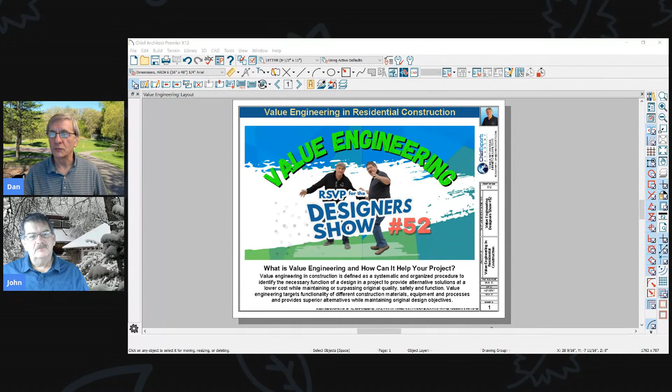It's, well, let me read this lovely description I got from the internet. What is value engineering, and how can it help your project? Value engineering in construction is defined as a systematic and organized procedure to identify a necessary function of a design in a project, to provide alternative solutions at a lower cost while maintaining or surpassing original quality, safety, and function. Value engineering targets functionality of different construction materials, equipment, and processes to provide superior alternatives while maintaining original design objectives. How's that for an explanation, John?

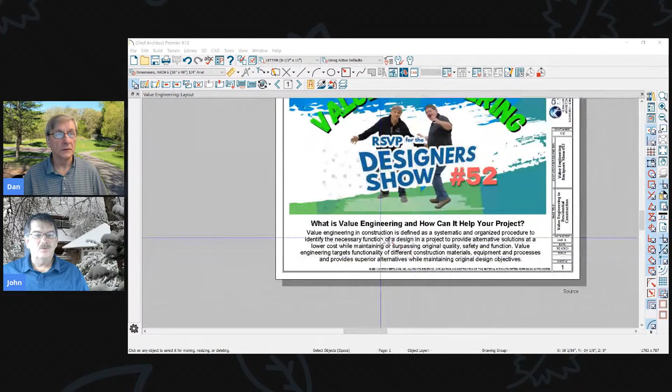That's pretty cool. I saw that and I thought, I like that. That's really, I mean, it's pretty deep when it gets into, but it's really true. What we're trying to do is find alternatives that work just as well or better at lower cost, while increasing the quality. Exactly.

So with what's going on in industry right now, with these prices going absolutely bonkers on your lumber and other things within the project, it's like, well, what can we do to maybe help in the process to offset some of those extra costs that are happening there? I know a lot of people, it seems like people are continuing with their projects, even though the prices have gone up 30, 40,000 on a new home, and more in some cases.

And then on large remodeling projects, you're going to deal with some of the same things, possibly partly because we've got lower interest rates. That's helping offset some of that. That might be part of it. I'd love to hear what other people are experiencing with that.

So guys, please chime in on this topic, and what are you seeing out there as far as what people are doing? Are people postponing their projects? That's one of the concerns I have, is if these prices keep going, people are going to halt. They're going to wait to do their projects, and maybe that's a good thing, maybe not. I don't know. Is it going to affect our industry?

I mean, I certainly don't have a crystal ball in any form whatsoever. Maybe we can go back and look a little bit at history to see how this played out, similar situations in the past, but I don't know. This is unprecedented, I think, with the way the prices are going. Are you aware of anything that was similar to this situation, John? Anybody out there? Are you aware of anything like this that's ever happened in the past? If so, let us know.

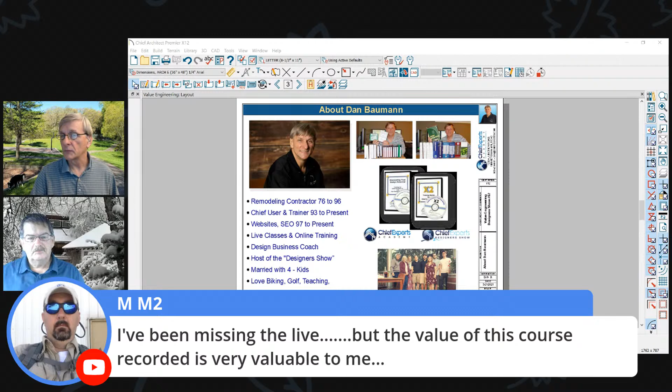I've been missing the live, but the value of the course recording is very valuable. Thanks, Mike, appreciate that. There's no slowdown in residential construction, in fact it appears to be picking up. Isn't that amazing? It's just mind-boggling.

Existing homes are okay. Existing homes in Oklahoma are going for unbelievable prices, and it's like that everywhere, crazy prices. Not slowed down, but there's labor with stimulus money staying home. Yeah, I suppose there's some of that going on.

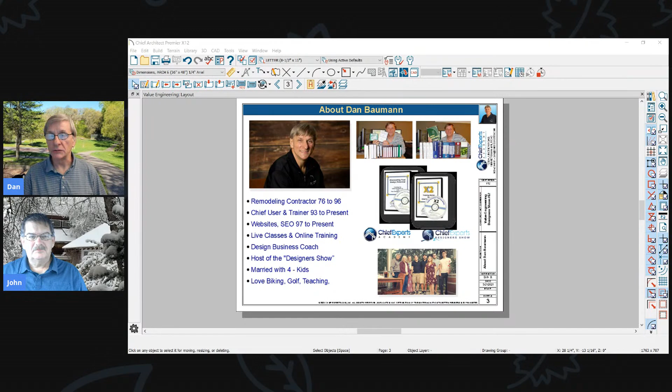Although, whatever, that's a whole different topic. But yeah, labor has always been and will continue to be a challenge in the construction world. It's just the way it's going to be.

Back to this a little bit. I left these in here from a previous presentation, just because I've been doing this for a long time. Been teaching using Chief since '93, doing websites, live classes. I do design coaching, design-build coaching. Got 4 kids, love biking, golfing, teaching.

And John, you've been doing this for a long time too, using Chief since '05. Long time, God, 16 years already. 17 years already, where did that time go? You've been helping with all my classes, you're just wonderful to have along to do that. I can't wait till we get back out there and do more.

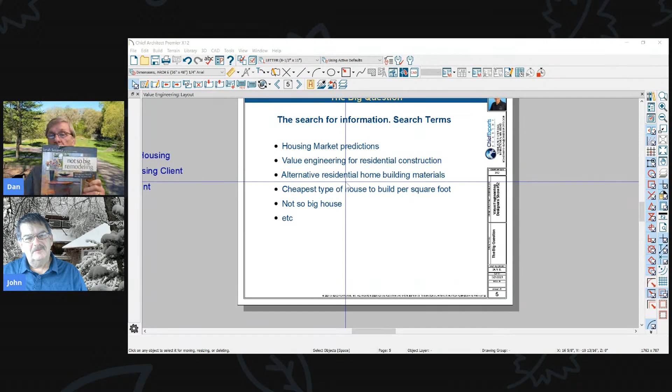I got on Google and started searching a few terms, and it's amazing the amount of information you can find with just a few terms: housing market predictions, value engineering, alternative residential home building materials, cheapest type of home to build per square foot, the not-so-big house. If you're familiar with Sarah Susanka's book, The Not So Big House, she has a whole series of these books that are really excellent, where she dives deep into adding more quality to the house instead of quantity. Highly recommend her series.

What's that, John? The square foot price of those houses is way higher than a bigger house. True, it could be. That's her whole deal: pack more amenities into a smaller package versus create a smaller package with some basic amenities. So you get a lower priced house, but the square foot price is going to be higher. Exactly.

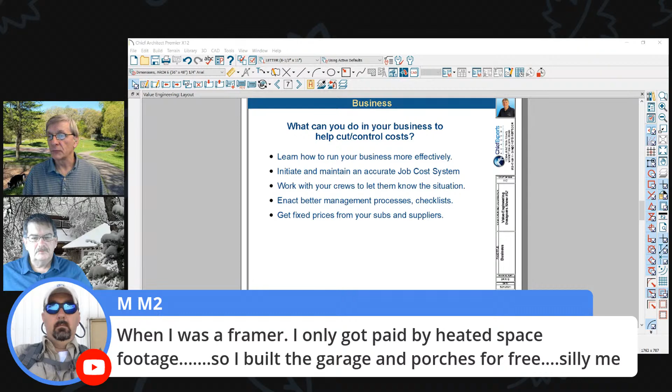Well, you should have just charged more for the heated space. That's another way to do it. In that case, if you want a cheaper house, just build a garage. Well, that's true, and then you can get it built for free. That's one way to do it.

So let's talk about something else. When we consider this as a contractor, and as a designer working with a contractor, what can you do in your business to help keep the job costs down, keep the costs of the project down? Because there's probably a lot of waste going on out there in a lot of companies that don't have some of these systems in place. Just learn how to run your business more effectively, and that goes without saying for anything.

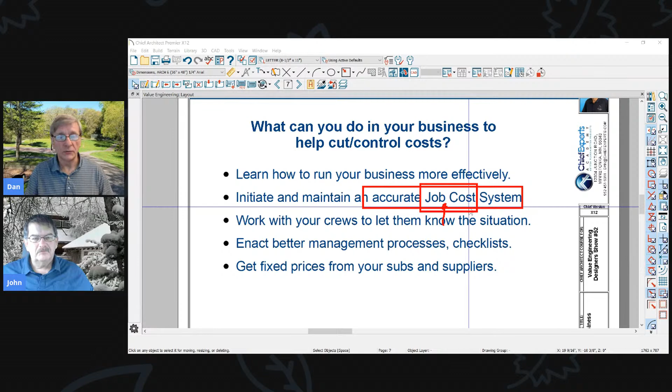Initiate and maintain an accurate job cost system. I think it's getting better out there in the industry, but this is an area I've seen a lot of contractors miss the boat on. You've got to know every penny of everything that goes into each specific project. So you need to implement a job costing system that works for your business — whether it's a spreadsheet, QuickBooks, or one of the other thousands of accounting programs out there, you've got to know the costs that go into every project. That'll help you now, and it'll help you in the future when you're working on future projects.

Work with your crews, let them know the situation. Hey, you bid on a job, you locked in a price, and now you're paying a whole lot more for materials — what can we do to put our heads together to save some money on this project?

Hopefully you've got clauses built into your contracts for the contractors out there, that if prices go up, which they have been and will continue, you're only locking in that price as long as the lock you can get from your lumber company. I know our local lumber company, Sher Brothers here, will lock a bid price for 90 days because that's how long their stock lasts. Which is kind of interesting how they do that — I don't know how they roll over the stock.

Enact better management processes, checklists, and get fixed prices from your subs and suppliers. Of course, if they were smart too, they would be putting a clause in their agreement that says if prices go up, you have to pay more.

Okay, yeah. So some of our trade and vendor pricing is good for one week. Isn't that amazing?

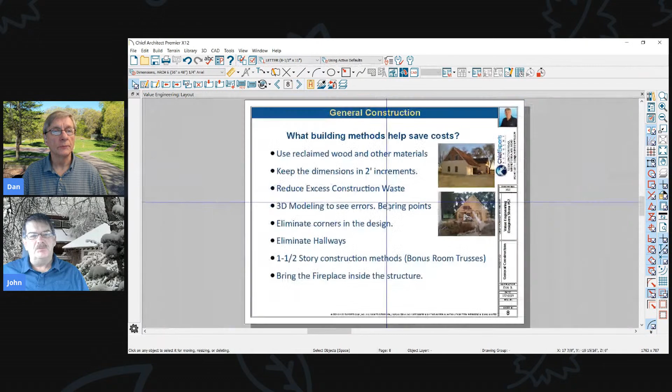My guess is it's prescriptive, like the energy code is prescriptive, telling you how you're gonna accomplish what they want. Where engineering in the energy code would be, you're gonna do all the calculations to make the system work the way the code wants it to work instead of just going by what the code says. So it'd be the same thing in engineering. Try to get prescriptive all the time. Okay, so we agree, try to get prescriptive all the time.

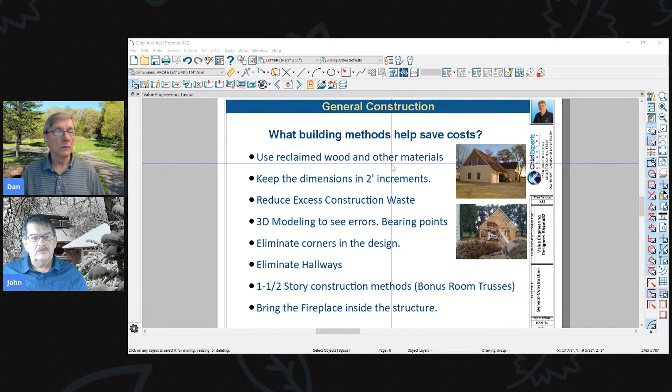Cool, all right, so let's look at a few different things. I just threw together a list of things as I was doing some research, and things that come to mind here. I would love you guys to put in what kind of things you're doing to lower the cost of your projects. I think this is really important that we share, let's put our heads together on this and share some ideas.

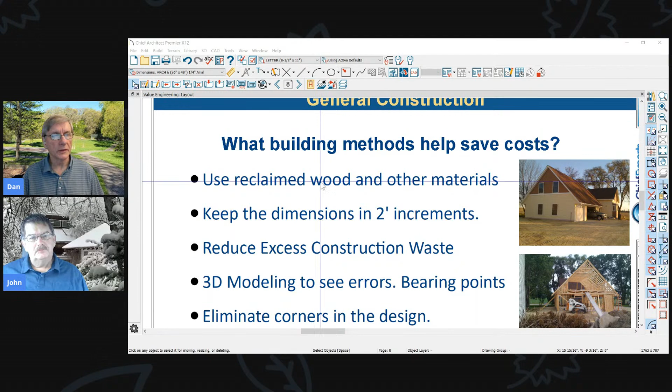Using reclaimed wood and other materials. Yeah, I mean, that's pretty obvious. If you got some leftover wood somewhere, use it. If you can get some wood that's used and it'll fit in a project, use it.

Keep the dimensions in 2-foot increments. Don't build that room addition at 16 foot 6 inches, because that extra 6 inches means you're going to waste a lot of material. Now your 16-foot boards have to go to 18. Your sheets are going to get cut off and you're going to have extra sheets involved. So that's a pretty simple thing to do in your plans, just keep them in those 2-foot increments. And I found that works really well.

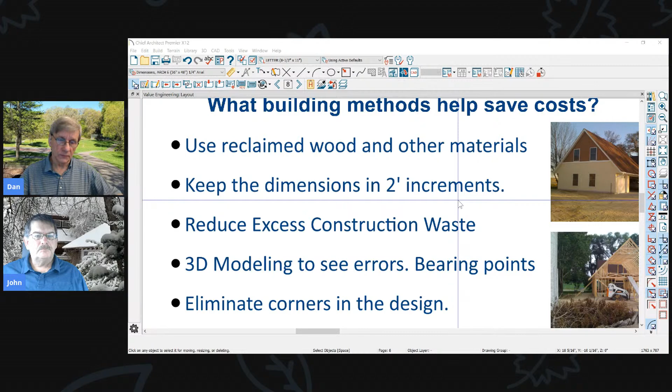Reduce excessive construction waste. I suppose that could go in a lot of ways, but again, I think with a tight plan, with the right dimensions, with ordering the right material... one of those might be, I know some contractors, they just put 2x10 headers everywhere. So they're buying all these 2x10s to do their headers. Well, why not use the right size headers above the right size openings? If you only need 2x4s over an opening, just use those. Don't use 2x10s. That's just from when material prices weren't such a big factor in a house.

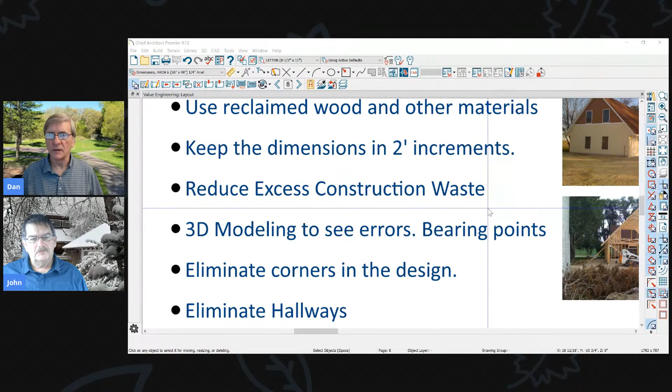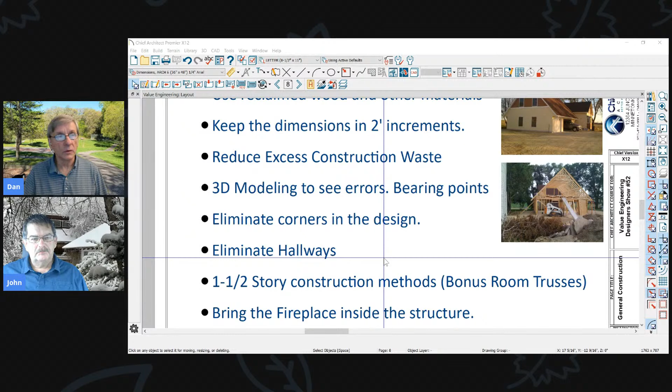What's a 12-foot 2x10 go for now compared to a year and a half ago, John? Any idea? You'd have to look it up, but I would suspect a lot more, two to four times as much. A sheet of OSB is $40-50 or more versus $9 or $10, which it was a year and a half ago.

3D modeling. Okay, this is where you Chief guys really benefit, in that as you're putting your plans together, you can see problem areas as you're working on them. So how are you going to work those out in your plan? Bearing points, you can easily see those from floor to floor as you look at your 3D model and pull that together.

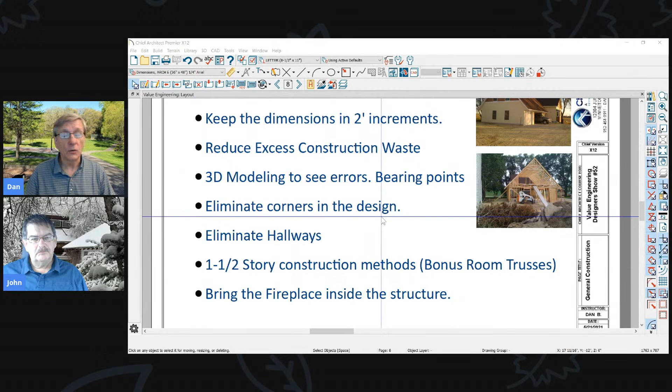Eliminating corners in designs. If you have a house that has lots of bump outs and angles and things like that going on, every time you can eliminate a corner, you can eliminate some cost in that project. And that's going to make a big difference.

Whenever people ask me how much per square foot this house is going to cost, I say, I don't know. If you build a 20x20 house, that's 400 square feet, you've got 80 lineal feet of wall. But if I build that 400 square foot house as 400 by 1, I still got 400 square feet, but I've got 802 lineal feet of wall. So the shape of the house makes a big difference in what it costs to build it.

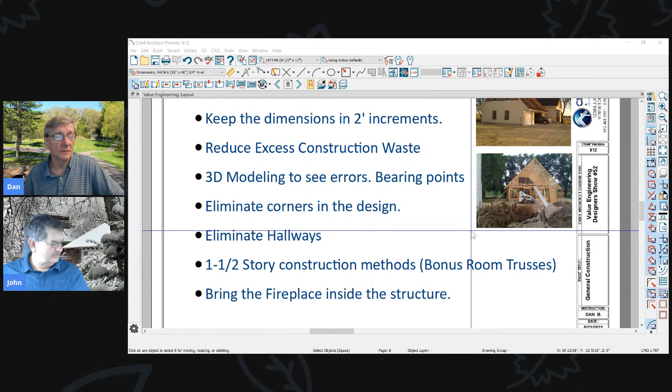It really does. So even on a bigger house, if you start pulling out some of those little bump outs and crazy things like that—in some cases they do make the design, so you need them—but there are places where you can always simplify things. Eliminate hallways. I think you mentioned this yesterday, John, in your plans. Yeah.

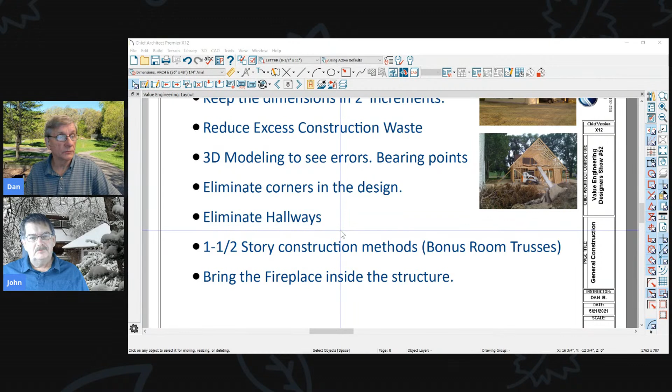If you are designing it, if there's any way you can eliminate some of the hallway or all of the hallway, it's just wasted space. If you can get it out of there, that's going to make a big difference.

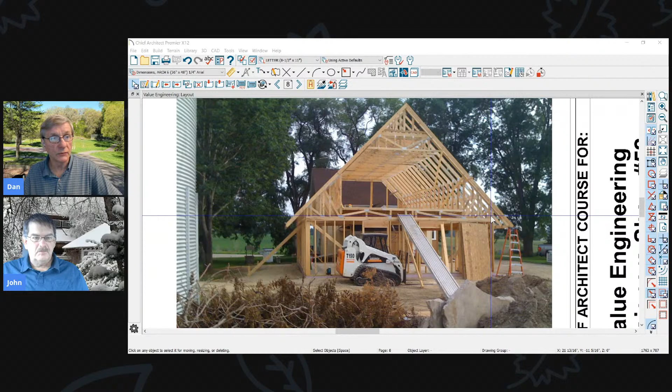1-1/2 story construction methods - I've done a lot of work for a guy named Bruce, and he built a lot of houses like this, using those type of trusses for the second floor of the house. Of course, he's not getting as much square footage, but he and a helper would put these up themselves. He had his Bobcat, he'd lift the trusses up and bam, they'd get that all done in a day. He really had a good system down.

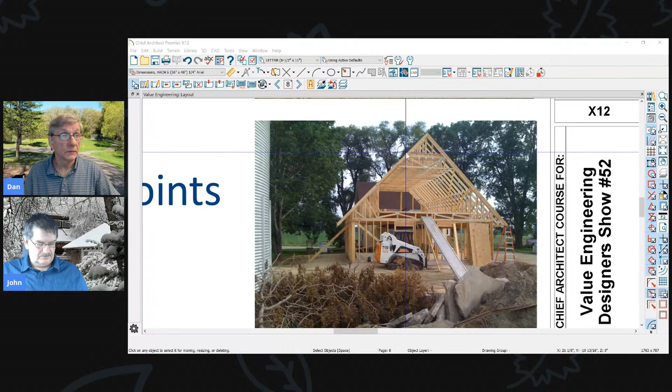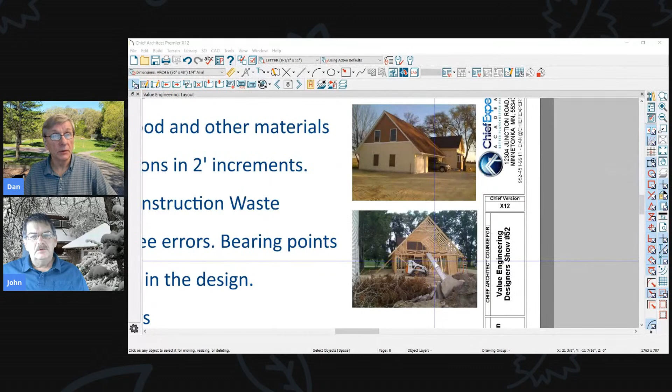He designed a lot of his houses like this, and they really turned out to be gorgeous looking houses. That's a good looking house when it's all said and done. So he focused more on doing nice finishes inside, a little bit better casing, things like that, but his construction methods were always extremely simple and easy to do. He could put up a real nice house, save his clients some money, and his margins were better than most. So that's another construction method I highly recommend.

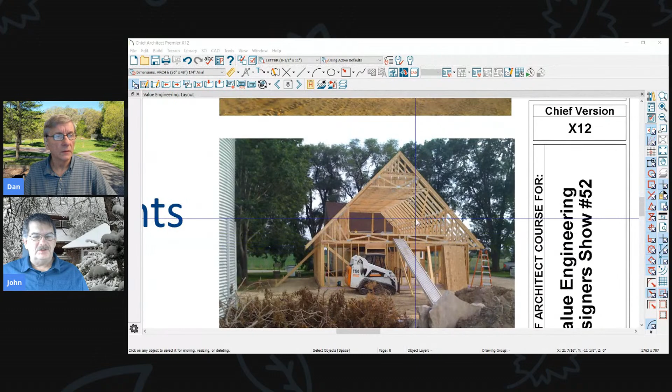You've done much of this kind of stuff, John? Not a ton, but that's my favorite design right there, as far as being cost effective and stuff.

How are roof truss prices affected these days? Is it the same price of the lumber rolling into trusses, you guys out there?

I'd also be interested to know how many people use trusses, because there's a lot of places that don't even use trusses. True, a lot of people hand frame.

Whenever I was building, I tried to use trusses whenever I could. It's just much easier to construct a project - no need for beams or anything, it's all built in. So it's a much simpler method of construction.

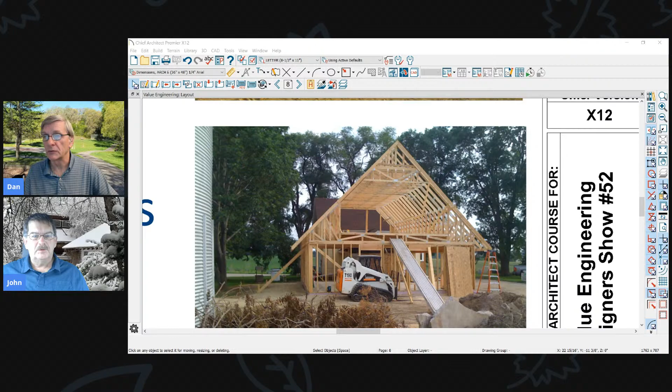I like trusses, but some guys just don't. Part of the problem with trusses is you got to wait for them. It's like anything else these days - you're 4, 6, 8, 12, 10 weeks out to get your trusses. That causes some real headaches sometimes. So something to keep in mind.

Bring the fireplace inside the structure. If you're doing a zero clearance fireplace, don't put the chase on the outside of the building - bring it on the inside and just run your venting out. That's going to save you corners, eliminating corners in that process, and that'll save you some money in putting that together.

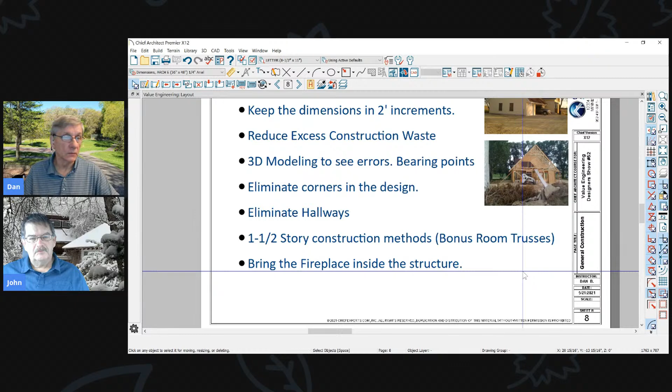It's a lot cheaper to sheetrock something than to put siding on it. So something to keep in mind there. But again, some projects need that chase to make the design work.

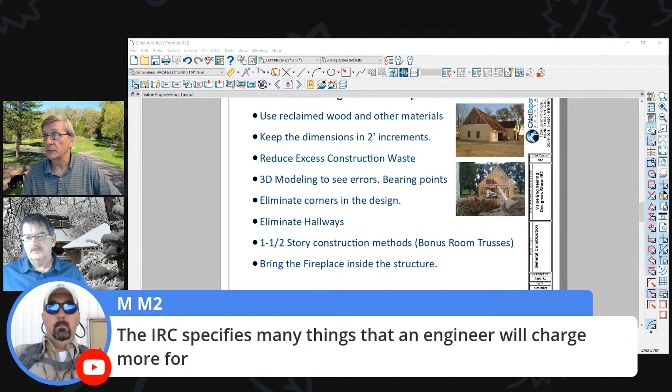So we've got a few comments here. The IRC specifies many things that an engineer will charge more for. Yeah, that's IRC.

Insulated concrete forms are starting to look cost effective. I've had a few builders switch from traditional foundation and framing to all ICF, partly because he was going to do a lot of the work himself in conjunction with the ICF supplier. It seems like many ICF suppliers will supply all the bracing and all the coaching, and in some cases, some of the labor to help put these things up.

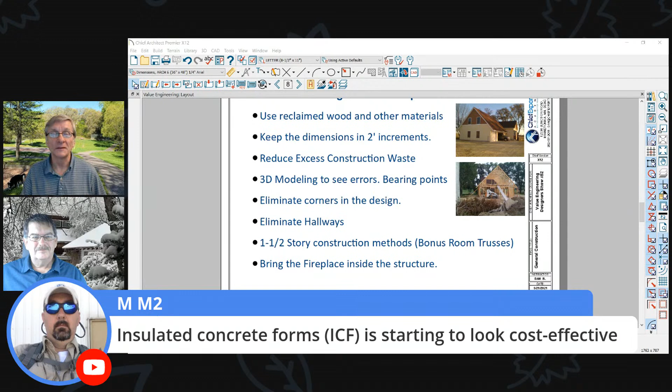One thing about ICF, you can never brace them enough. I had a friend of mine did an ICF once and they didn't brace this one wall enough, and it started tipping. They had to tear it out and redo that whole wall.

Not cool. Offsets may look cool, make a nice roof line, but it's a pain with most trades. Yeah, absolutely. Total project schedule for all trades based on tasks required to maintain construction schedule, plan construction drawings accordingly.

So just having a good schedule for the project so everybody can get in and out as planned. That's huge. I wonder how many contractors actually do construction schedules, because they're easy to do but hard to implement. If one thing gets blown out a little bit, now everything's out of whack.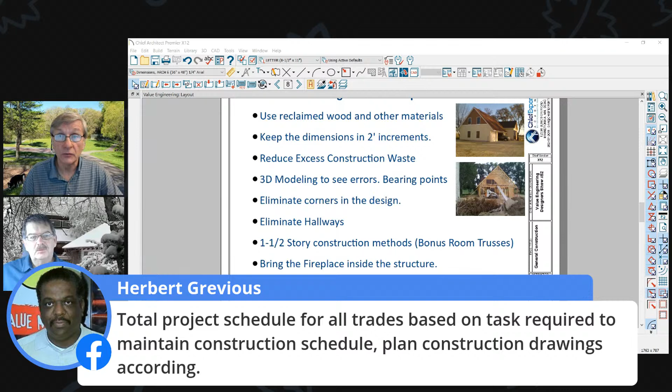I know a lot of the software products are making that a lot easier now. That's a good thing. Yeah, it's kind of like job costing in a way - if you have a good software program that'll just adjust everything when something doesn't work out, now you know where you're at.

With your other jobs and stuff, it's got to adjust, and you got to make sure everybody's aware of the adjustment and that everybody's okay with it. So anytime you change that schedule, and if there's delays, now the trusses are a week late, great, yeah, it just screwed everything up.

There's software out there that'll do a lot of that work for you, as far as keeping everybody in the loop. Yeah, it's a lot of this. Your Co-Construct, all of those types of software, you can run that kind of stuff through.

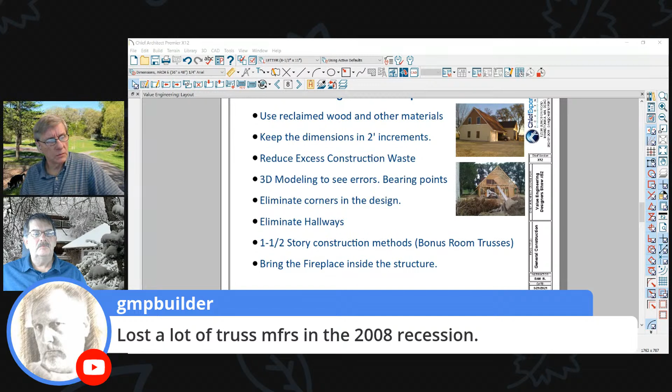We lost a lot of truss manufacturers in the 2008 recession. Yeah, we did, didn't we? There's one right down the street from us that closed up - EPCO, is it EPCO? You might be aware of it, John, but they're gone. Now they cost more and come from farther away, because we have less of them. That's a good point, that's a really good point.

Have any of you guys out there adopted any new building methods that you weren't doing before? Are you using different materials? I was talking with my contractor in Texas a few days ago, and he was saying that they could buy the oriented strand board framing lumber for just a few bucks more than typical lumber.

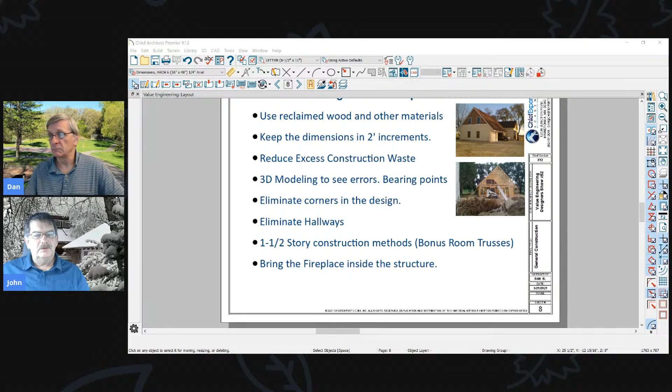Really? Maybe it's just a supply and demand thing going on, they've got a lot of this and not much of that. So they're thinking they're going to do a lot of that now. It's just like, holy smokes. And if he runs the whole package numbers, he might find out it's a wash, or it's actually cheaper because he's not going to have the waste he has with lumber.

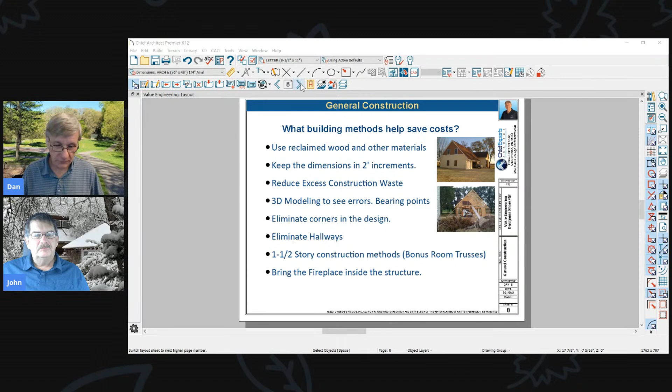And now you've got a stronger building that's going to be straighter for the same price. It's just amazing, it's just amazing.

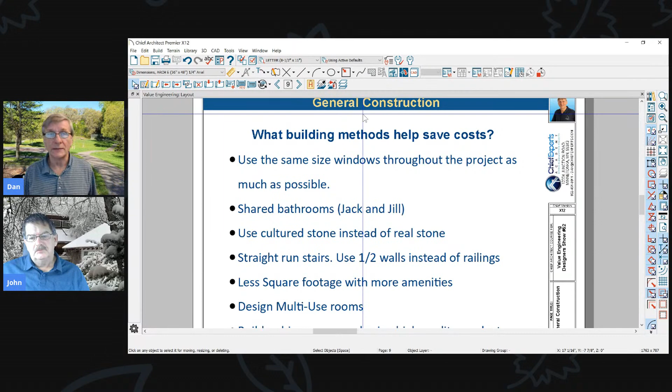I like those floor truss systems that were trimmable. Have you ever used those? I've seen them, I haven't had a chance to use any. I always thought that was a great idea. I just learned about those about a year ago, because in the past you always had to know the exact length and order the trusses the exact length, and you couldn't really trim them much. But now they have the trimmable floor trusses, which I think is fabulous. I got to assume they're probably doing something the same with roof trusses, maybe, I don't know.

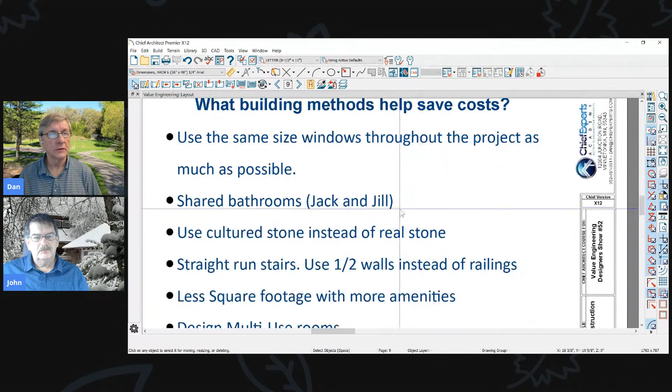The same guy that does these story and a halves would typically use the same size windows throughout the project, with a few exceptions of course. Bathroom windows are a little smaller, but he tried to keep everything real similar so that there wasn't much - it's hard to order things wrong when they're all supposed to be the same.

Shared bathrooms, obviously the Jack and Jill, that's been around forever, and maybe these days that's not a bad idea to save the cost of a bathroom. Instead of putting a bathroom in every bedroom, let's share a bathroom.

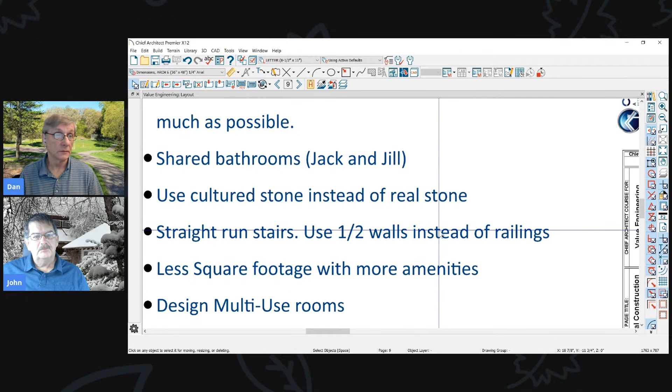Straight run stairs instead of the L shape or U shape - that's going to be a whole lot easier to frame in and install than a different shape or even a curved stairway. And using sheetrock walls, half walls instead of railings, that's going to save a bunch of money too. Again, a lot easier to throw up some sheetrock and paint than it is to put in a custom handrail.

Less square footage with more amenities - again, that gets back to the not so big house. So you guys should check that out, go Google 'not so big house,' 'not so big remodeling.' And I'd recommend you get Sarah's books or whatever other books you have. If you guys have some books you recommend, type them in, I'd love to know more about what you guys are looking at.

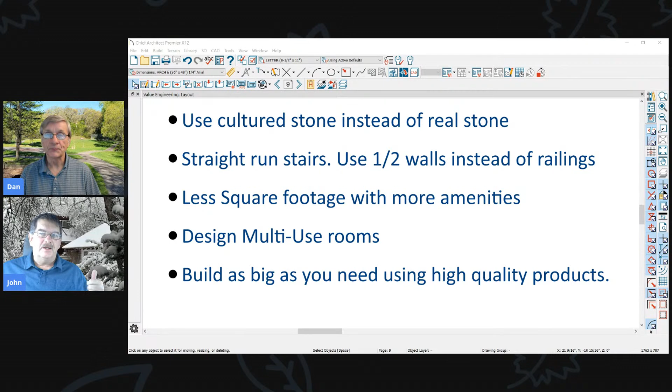Here's a less square footage example for you. I tell people that in our van that we built out, we have a kitchen, a bathroom, living room, family room, 2 offices, a bedroom, a 2-stall garage, and a workshop - and it's all multiple uses. In your van? In our van. There you go, multi-use rooms. It's just fun - well, that's my living room, it's an office, a living room, a studio, production place to do live videos.

There you go. Yeah, use your walkthrough spaces as a living space, instead of having hallways. Yeah, we don't have any hallways in our house on the first level. I do it upstairs, but yeah, that's true. You walk through my kitchen to go everywhere in my house.

Prefab insulated concrete foundation panels - we talked about that in our structure class. That company makes those. Lake Homes 5/8 T111 works for shear and sheathing and siding.

So you don't need both - it provides the shear strength of the wall. You put that right over the studs and you're done, you don't have to have both. We had a lot of Lake Homes around us from the 50s that just used tongue and groove siding as the sheathing and the siding.

A lot of warm climates used to build that way. Now they put a little house wrap on there and then put the siding on top of that, don't they? Yep, so that's cool.

Here's one - green, thank you. So I was just saying, this picture right here is the one time I have a decent picture to show, where you wrap the sheetrock into the jamb versus putting the extension jamb and casing on, at the sill and all that. I see a lot of these down south, and they'll use a marble or a solid surface sill down there. Pretty simple.

Here's one I like - use large pantries in kitchens instead of big pantry cabinets. You could take a lot of cabinets off of the plan with a large pantry. And in many cases a large pantry is going to be a lot more accessible and work better anyway, so that makes good sense to me.

Another way - even use the pantry for some things like your microwave, so you don't have to have a cabinet for the microwave. Very true, very true - almost like a butler's kitchen.

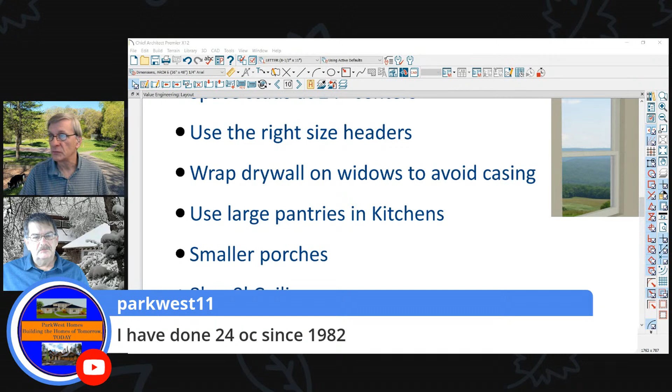Park West 11 has done 24 inches on center since 1982. Cool - is that with 2x6 construction or 2x4, or both? I'd be curious about that. I do that, I don't do OVE though. Advanced framing equals 24 inches on center studs, single top plate, etc.

Did you send me something about that in the past? I've read about this kind of stuff - if you line up your joists and rafters with your studs as much as possible, you can see where you start adding up all that extra lumber. That's going to cut a few bucks off the cost of a project and you're still going to get just as good of a structure. So that's a really good one.

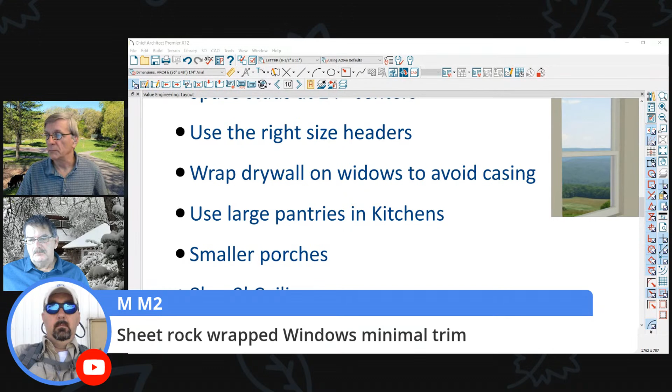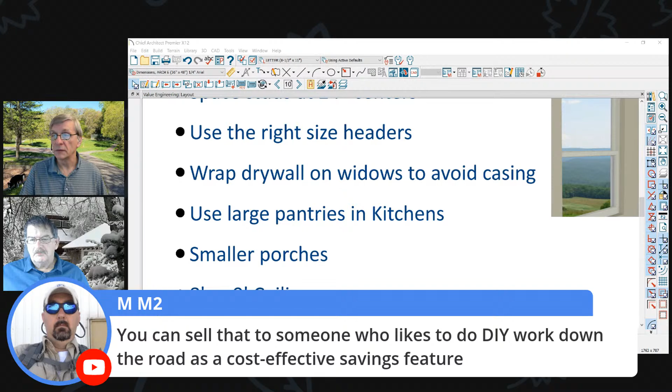Sheetrock wrapped windows - that's what OVE means, I guess. Minimal trim, great way to save a bunch of money on a project. Yeah, all your apartment buildings, that's what you're going to see. You can sell it to someone who likes to DIY work down the road as a cost-effective savings. It's not much different than an unfinished basement - hey, you guys can finish that later, we'll rough it in.

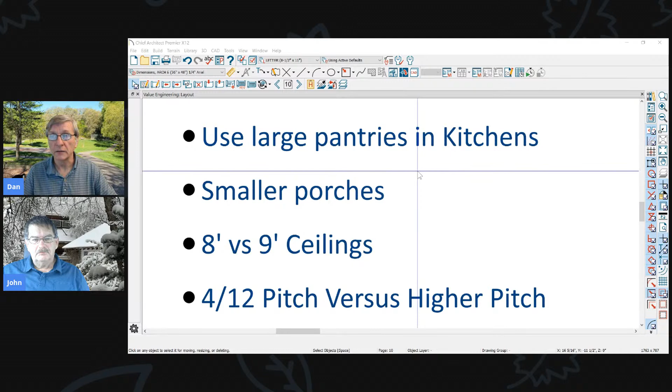All right, so smaller porches on a house. People want to have a porch, but does it have to be 20 feet long? Could you do an 8-foot long porch and still maintain the intended look of the building, the architectural styling of the building? It's just one of those things that anytime you can make a space a little smaller and still get the same intended results of that space, why not?

8-foot versus 9-foot ceilings - it seems like 9-foot's become the norm these days for most places. Are we going to start seeing people going back to more 8-foot construction with the cost of construction? I don't know, I'm just asking the question. Most of the projects I design are all at 9-foot, so the only time I really do 8-foot is when we're doing remodeling and trying to match up stuff.

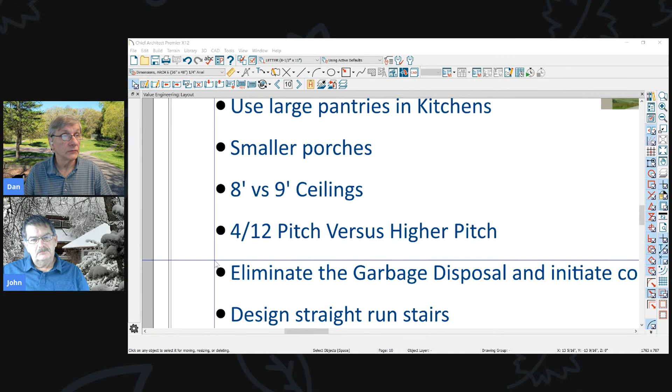What's your experience on that, John? I guess my thought is, as long as the mortgages are cheap, as far as the interest rates, I don't think we'll see much of a change. But if the interest rates start going up and the money starts getting more expensive, I think then we'll really start seeing some things. I think there's one thing that is certain in our industry and everywhere - something's going to change soon. Maybe not soon, but things will change. That's a given. That's part of what makes this fun and exciting, is things are always changing.

Park West says 2x6 exterior and 2x4 interior walls, both 24 inches on center. Okay, cool - are you using different sheetrock, different drywall when you went to 24 inches on center, or does regular drywall perform fine on that? That'd be a question I have. And how about your joist spacing? Are you doing ceiling joists and roof joists at 24 as well? Yeah, let us know, love to hear what you're doing. You can go far with reducing materials. Yes, optimized value engineering, OVE - I like that, that's better than value engineering.

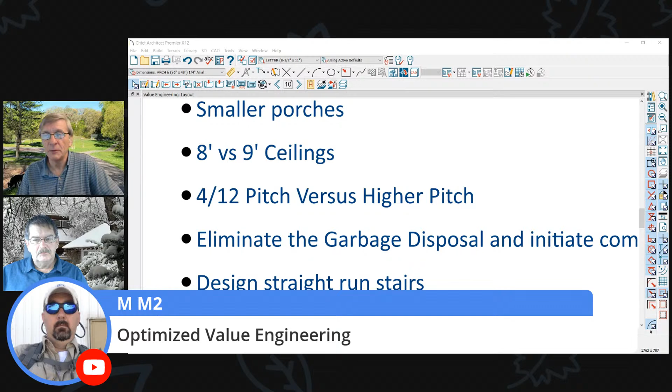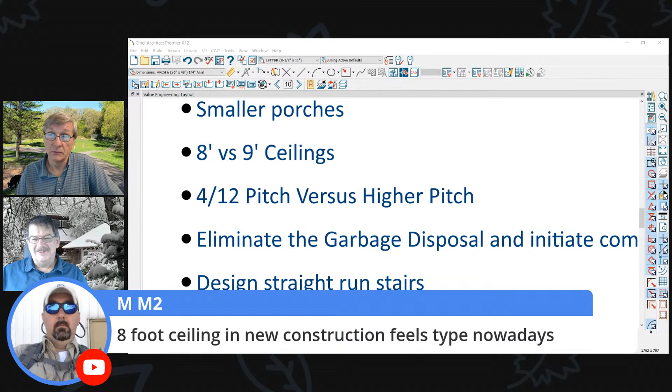8-foot ceiling in new construction feels typical nowadays. Typical or cheap nowadays? It does feel cheap nowadays. Anytime you add more materials to a project, more footage, whether it's going up or out, it's going to add to the cost of the project. So from 8 to 9 foot, what is that difference? I have no idea, but it's got to cost more, because now you got to buy 9-foot sheets instead of 8-foot sheets, or you got to splice in a foot.

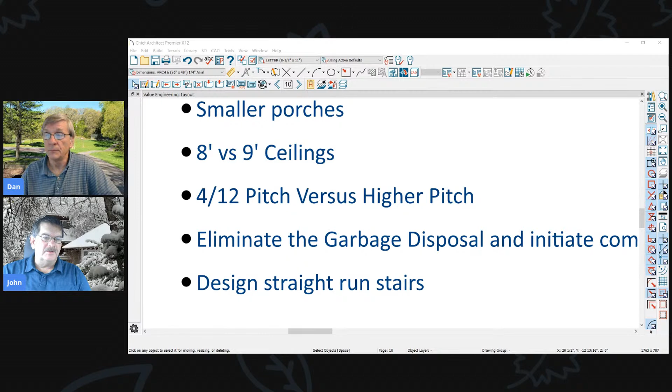I just did a design for somebody that wanted to go with 8-foot ceilings because we were doing SIP panels, and it's cheaper to do that at 8 feet. So we did that, but all the bedrooms were 8 feet. We put a vaulted ceiling in the living space - living room, kitchen, dining room area - to raise the ceilings, so that helped a lot. All the exterior walls were 8 feet, but to make it feel higher, we put a vaulted ceiling in the living room.

Did you use SIP panels on the roofs? No, we just used regular trusses, kind of a sloping up and over. So you had a little bit of an angled ceiling in the rooms, or were the trusses built up a foot? The trusses have an energy heel, and it's a 6/12 pitch roof, so we put a 3/12 vault over the living room, kitchen, and dining room - creating a tray ceiling in it.

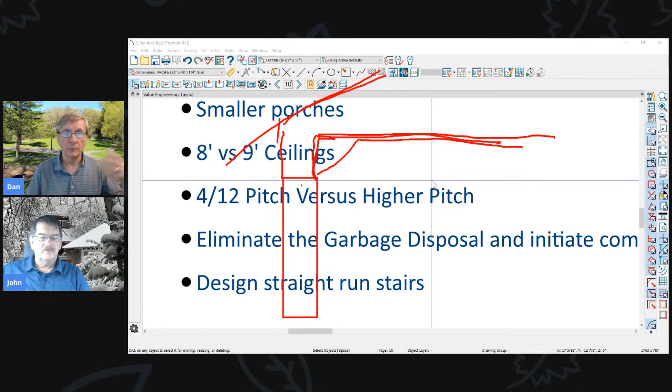I've done this on remodeling projects where we maintained the existing walls but wanted higher ceilings. So we designed the trusses with a 12-inch heel on the bottom to make up that difference to go to 9 feet. Just another way to do it. I don't know if that makes a huge difference in the cost of a truss, but you're still adding that extra height. So if you're doing new construction, just frame it that way from the start. That would make sense to me.

Is Chief's Material List okay for doing takeoff and pricing, or is QuickBooks or Plan Swift better? Chief's Material List is great for getting your quantity takeoff of your areas, and if you've done the framing in the project, you'll get a pretty accurate material list for the framing. Then you can go into the program and start adding prices for those areas. But there's going to be a ton of stuff missing. Chief's not going to put in anything unless you've drawn it, so you have to be really careful with that.

I'm on the mindset that you just keep doing your bidding and takeoffs the way you've always done it, whether you're using a takeoff system like Plan Swift, taking off on the screen using a digitizer, or whatever you do. What are you thinking about these days?

Like you said, you've got to draw the plan really accurately to get a good material list out of Chief. What I've done in the past is use the material list off of Chief, like the areas, to look at that, and if there's a big discrepancy between Chief and my takeoff, I'll go look at it again. The quantity takeoff in Chief is going to be very good if you've drawn the project right. So when I help people do material lists, we'll use those numbers. I don't do much with material lists myself, so I'm not the best authority on that, but I know there are people out there using it. One of these days we'll have to dig into that.

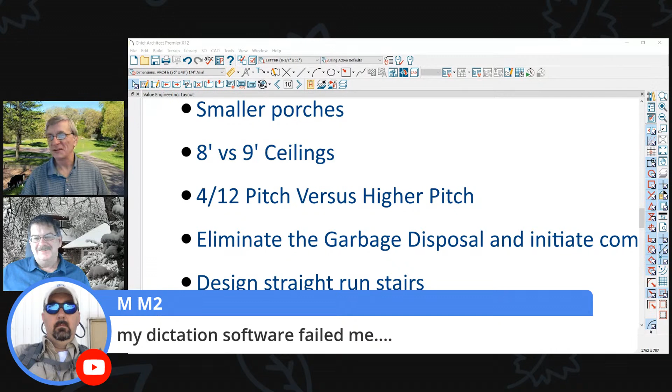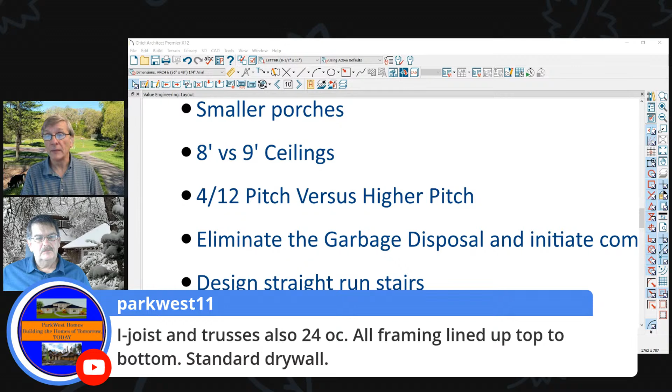People will not entertain an 8-foot plate here. Carl, where are you located? I don't remember — I-joists and trusses, also 24 on center, all framing lined up top to bottom, standard drywall. I've read about this in the past, and it always made logical sense to me that it would work just fine. The only question I ever had was whether the sheetrock would start sagging on 24 centers versus 16 inch. But if you're already doing 24 centers on roof trusses and your OSB sheathing is working fine on that... Of course, I know some guys that always go to 5/8 inch CDX or something like that. Hard to say.

Roof pitches — a 4/12 pitch versus a higher pitch. Every time you add an inch to the pitch, you're adding more material. Not necessarily, well, maybe a little more labor because you'll have more shingles. You get to a certain pitch and now it's not a walker anymore, so it's going to cost more to put the shingles on. Of course, the way they put shingles on these days is so amazing how fast they can whip those things out. But anyway, that's something to consider. If you're doing more contemporary styling, maybe a lower pitch is the way to go.

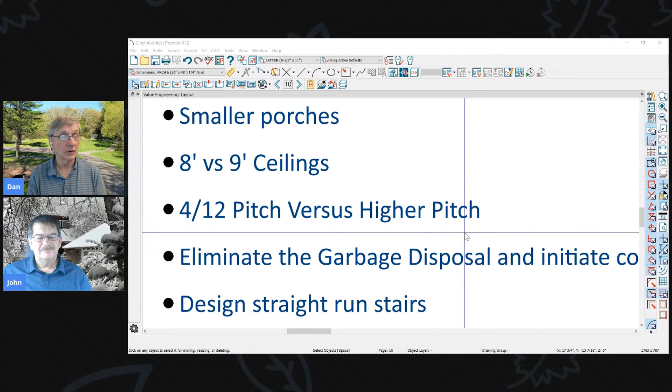And keep it that way. You brought up the way they're doing shingling nowadays. It's really fast. Some shinglers probably don't know the fastest ways to do it because it started in other parts of the country. Like the last shingling job we did, we learned a new technique to do valleys that was a lot faster.

Really? What'd you do different? What you do is you take a shingle and lay it up the valley, going parallel to the valley, and then you just start laying the shingles on top of that, setting the bottom corner of the shingle right on that line. You don't cut the valley at all. You take the next one, you lay it so the bottom corner hits. It's really fast. Interesting, I'm not familiar with that.

And because you have the laminated shingles now, you don't have the watermarks or the three tab issue. As long as you're 6 inches away on your splice, it doesn't matter where those splices are at anymore. So you just lay it up. It's pretty fast. It's been a while since I've done any shingling.

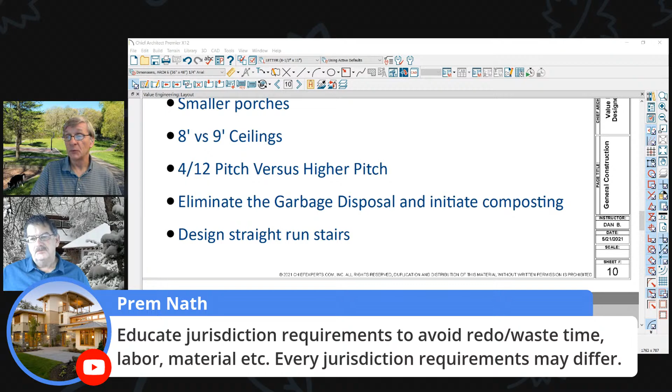Educate jurisdiction requirements to avoid redo, wasted time, labor, and materials. Every jurisdiction's requirements may differ. Good point. Sometimes you have to educate the building officials in your areas.

Carl's in Oklahoma. Okay.

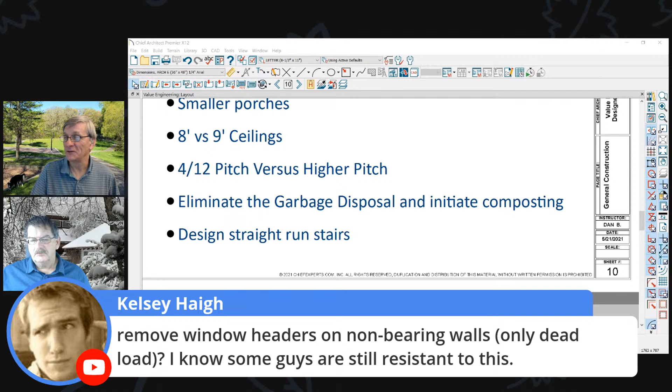Remove window headers on non-bearing walls, only dead load. I know some guys are still resistant to this. Yeah, my brother would be. My brother Doug, he loves to overbuild everything. It drove me nuts back in the construction days because he would always do that kind of stuff. It's like, Doug, what are you doing that for? Because it's stronger. But it doesn't need to be.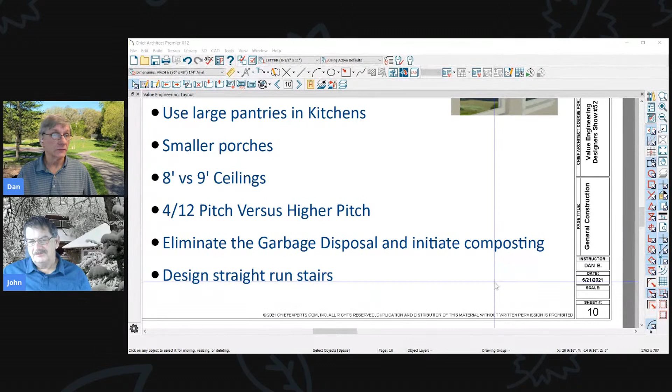Anyway, I think I already said the straight stair run thing. Eliminate the garbage disposal in the kitchen. That's kind of a personal preference thing, but do composting instead of using a garbage disposal. I know a lot more people are doing that. It's kind of a normal thing now.

Using a tub-shower combo in a master bath instead of a separate tub and shower, or just get rid of the master bathtub altogether. I see that nowadays—people aren't doing bathtubs. Anybody out here designing master suites without bathtubs these days? I know a lot of people are designing without whirlpool tubs, just doing soaker tubs instead. That seems to be more of the norm.

Build your walls straight up—build your foundation a size and double up on top of that. You only have to build your foundation once. Instead of spreading the house out, spread it up. That's going to save you some money, keeping all your walls going straight up somehow. That's just common sense there.

Do rough-ins for future baths, things like that. Simplify the roof system as much as possible. Find alternative materials—I was reading an article, they're creating sheathing out of mushrooms. Really? Talk about eco-friendly. I'd have to go find that article, but it was really interesting.

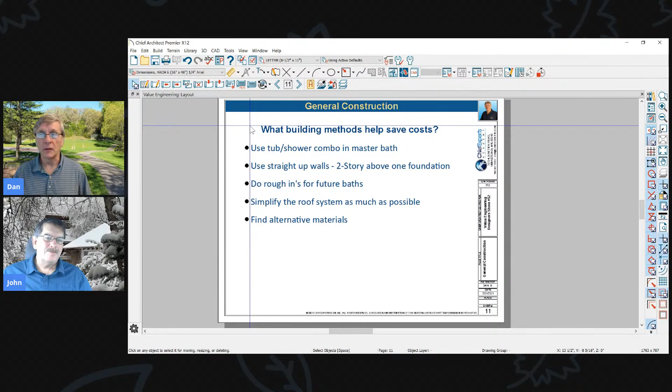I really encourage you guys to do a little searching on this topic. Google has a lot of information to help us find things. But yeah, definitely do that. And if you find some things, I'd really love to know—just forward me the link or something, and we can share more of this stuff as time goes on. It's a really interesting topic, and as our industry changes, we as designers have to keep up with all of this.

What were you gonna say, John? I was just gonna change the subject a little, going back to rough-ins for future bathrooms. If you're building a starter house and somebody wants to expand their home later, make that future bathroom a closet on the first floor so you can get a certificate of occupancy. Or with attic trusses, give them an unfinished basement or unfinished attic trusses so they can get a certificate quicker.

Yeah, bonus room—you see that a lot above garages, the bonus room that you can finish later. Great way to do it. Of course, you're going to pay more for the trusses to make that bonus room happen, so it's going to add cost to the project. But the future square footage they can add, that's a no-brainer. So that makes pretty good sense.